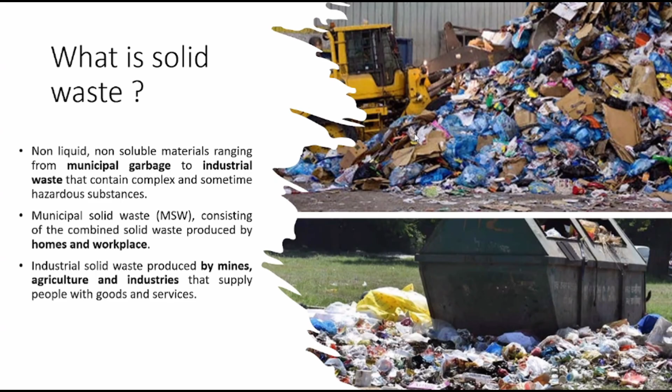Okay, so let's see in Malaysia. In Malaysia, we are producing almost around 39 kilotons of solid waste, which is equivalent to an average of 1.17 kg per person. So it means that per person every day we are producing on average 1.17 kg of solid waste. And this number of tons is actually increasing. It does not decrease, it is increasing.

And out of the waste that we are producing, 30% of the waste is municipal waste, which is from your households. And the only place where we are discarding all this waste is your landfill. So basically, whatever municipal waste comes from the household, factories, everything will be collected and it will go to your landfill.

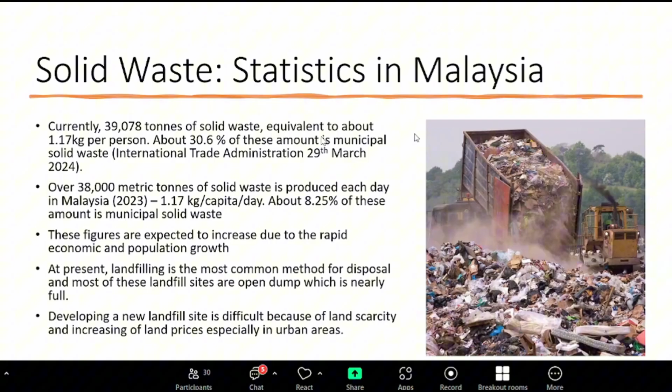And do you know how many landfills we have in Malaysia? Anyone? Ten per state, sir. You know. That's a lot. Okay, see, a landfill is not just a dumping area actually. 165, 135. From where are you guys getting these lucky numbers?

Okay, they are not just an open area where you just dump your solid waste. A landfill is actually a constructed landfill. It has some kind of layering, which we will see later. And for a landfill, you need a big, large area. It has to be separated from household areas. So it has a lot of criteria.

And especially in urban cities, you cannot have landfills like, how you say, 10 per state. Because when you have landfills, it smells bad. And it also invites all these infections because it's a landfill. You just dump your waste there.

So as Malaysia continues to grow in economy and population, our amount of waste is also increasing and it's expected to increase in future. So our major challenge here is how to dispose of our waste in a sustainable way. Sustainable way means whether you can convert your waste through recycling, or convert it to compost, or reduce the production of your waste. Okay.

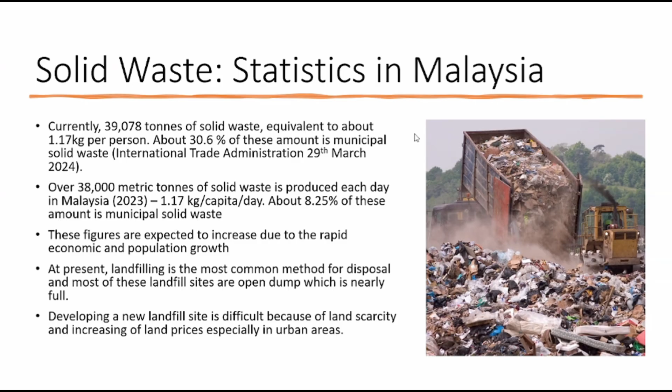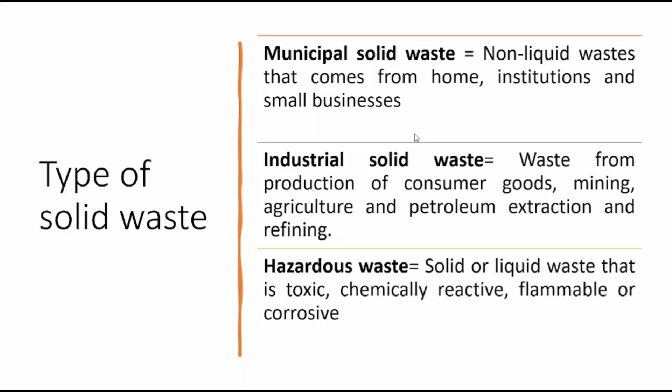Okay. So basically I have explained what is municipal solid waste, what is industrial solid waste, and also what is your hazardous waste here. So next, how you classify your solid waste, which is very, very important, especially if you are planning for waste management, recycling, composting system.

So as we know, our major component of waste is organic waste, which is your food scrap, or the papers, plastics. So generally, organic waste will make up 40 to 50% of your total waste. So it means composting could significantly reduce the landfill load. Because when you do composting, you need carbon source and also nitrogen source. And organic waste has carbon source. So you can reduce the waste, like food scrap, it has carbon source. So you can reduce it by using composting.

But one of the major issues here is plastic, the usage of plastic, because plastics are commonly used for packing. It's generally a single-use item, and there is a lack of recycling infrastructure for plastic. So that's why we are going to see plastic in more detail. So if you see plastic, you can divide them into several categories, and that category is depending on the property and also the recycling code.

So your first one is PET plastic, the plastic commonly used for your soft drinks and water bottles, which can be recycled into fabrics or new bottles. Then you have HDPE. So this is the plastic that you use for your detergent bottles, shampoo bottles. They are much stronger compared to your PET, and they are also recyclable.

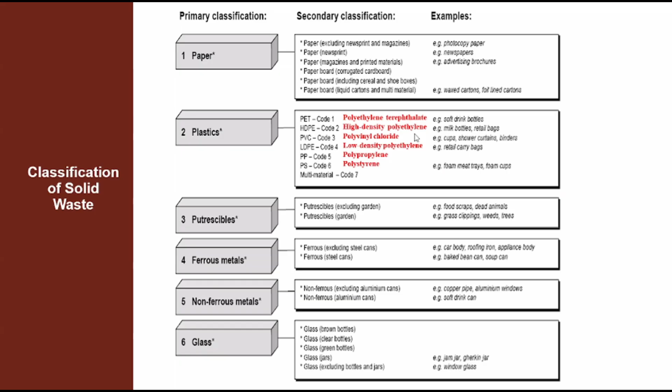Okay. So besides plastic, you also have other waste like paper, glass, rubbers, and many more. You can go through these two slides for it. Okay, so what we are going to see here is solid waste management. So now you know what is solid waste, what it is made up of, so how you want to manage it.

So managing solid waste is a process that involves collection, transporting, processing, recycling, and disposing the waste materials. So the main reason why you are managing your solid waste is because you want to protect human health and also you want to conserve the environment, so that you can make sure that resources are effectively used rather than degrading the environment.

Okay, so there are three components in waste management. The first is collection. So basically, you pick up the waste from the household or business or any streets, and then you transport it. So you move the waste to treatment or to any disposal sites using any transportation. And then finally, you dispose or you process, where you handle the waste. Either you want to do recycling, incineration, landfilling, or composting.

So in many developing countries, generally collection and disposal is the one that is highlighted. While when it comes to recycling and reduction, it's something that they haven't looked into. So generally people see how to manage the waste that has been produced, but they never thought of converting the waste into something else or reducing the waste.

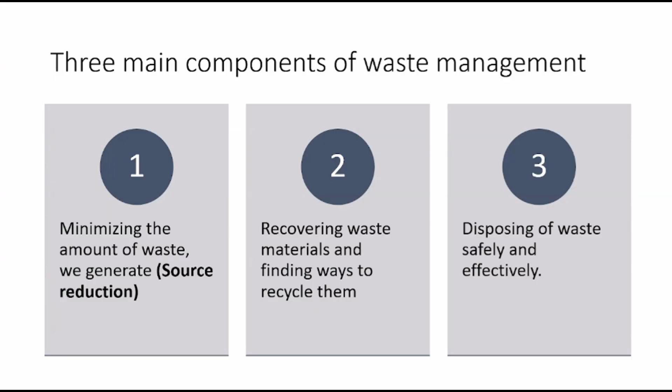Okay, so that's if you see household. So if you focus on industrial, there are many kinds of steps where you can reduce your waste. For example, if a waste stream is there, there are several steps where you can reduce your waste. For example, you can minimize the packaging for products. So maybe instead of individual packaging, you can do group packaging, or you can use a green consumer product like a biodegradable product instead of a product that cannot be recycled.

Then you can reuse items like glass bottles. Maybe you can reuse them once you have given them to your customers or to shop vendors; you can collect them back, sterilize them in a nice way, and reuse them, or you can recycle the items. Or if you have organic waste, you can convert it using composting techniques and make it a new product, where the compost can be used to grow trees.

So these are the steps that you can use to reduce your waste so that the amount of waste that goes to landfill is reduced. Okay.

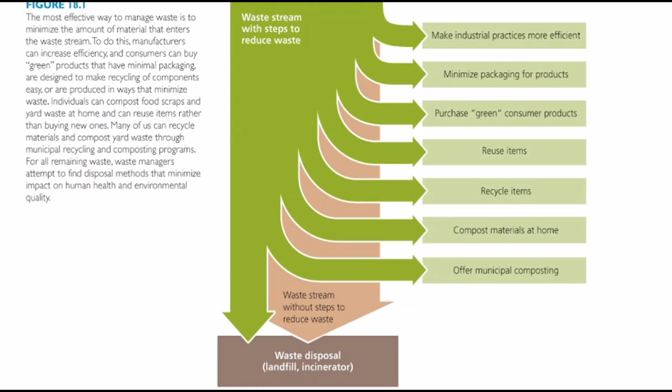Okay, next is municipal solid waste, which is your household waste. This is waste produced in everyday life, and it is usually referred to as trash or garbage. It includes household items, food scraps, paper, packaging, plastic, anything that we generally discard at home. And the composition of waste varies from place to place because of our culture, our lifestyles, and also the economic status.

So generally, like Malaysia, we are a developing country. We discard a large portion of organic material in terms of food waste. When we look into wealthier nations, they discard more paper, packaging, and plastics, which is their main solid waste. Okay.

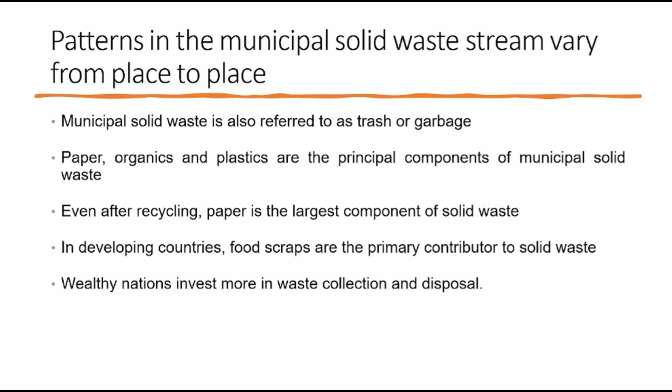Okay. So as I mentioned previously, every day we as consumers, as Malaysian citizens, are generating 1.17 kg per person per day, which ends up in our landfill. Around 90% of this waste is still in the landfill, and only 10% of the total generated waste has been recycled. So that puts pressure on our landfill system because it is nearing capacity.

So it's like over 40% of Malaysia's 175 disposal sites are still operating as dump sites, which we call landfills, and they lack environmental control because of our rapid waste generation. So that's the reason we have to focus on sustainable waste disposal.

Okay, so when we talk about a waste management system, it should not only focus on disposal and collecting your garbage. It has to be a modern system, an integrated waste management. Integrated waste management combines various strategies to handle waste more sustainably so that you can minimize the total amount of waste that ends up in the landfill. This whole system includes waste reduction at the source, recycling, composting, and proper disposal.

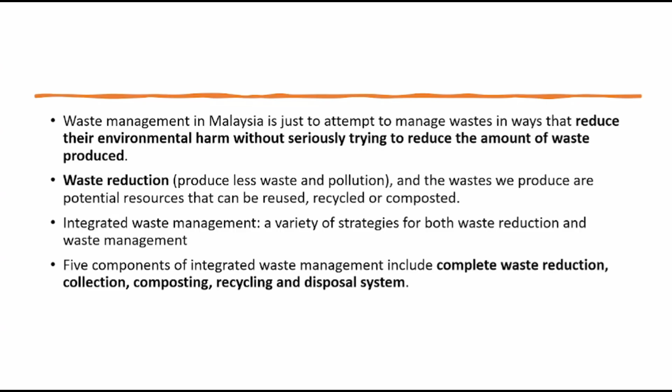Okay, so just now I was talking about landfill. So what is a landfill? A landfill is basically called a sanitary landfill. It's a modern engineered facility where you isolate your waste from the environment until it becomes safe. Okay?

Because when waste is discarded, it will start to decompose, especially your organic waste, and it will release gases and microorganisms, which could be hazardous to the environment and also human health. That is the reason a sanitary landfill is built, so that it isolates the waste from the environment and from human beings. So this is not like an open dump area.

Your sanitary landfill is designed with liners, a drainage system, and monitoring wells. When your waste starts to decompose, it releases a liquid called leachate. This is a contaminated liquid which forms when rainwater filters through waste and dissolves harmful chemicals. Okay, so that's the reason you have to manage it properly. If it is not properly managed, leachate can pollute your soil and your groundwater.

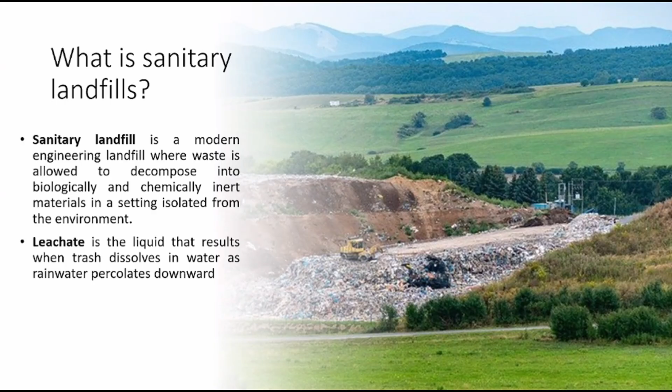Okay. So when I say a landfill is an engineered structure, this is how it is constructed. It's all about layering. It has 4 main layers, and those 4 main layers make sure that the waste does not harm the surrounding environment. So your first layer is called the liner system. Basically, it's the base of the landfill.

And it is made up of compacted clay, which is dense enough to prevent water from seeping through. So basically, the compacted clay makes sure that no water seeps through and goes to the nearby soil or groundwater. Then on top of that, they have installed this high density plastic liner, which gives extra protection. And that creates the barrier between the waste and the natural soil and the groundwater. So that is the liner system.

And then it is followed by the drainage system. As your waste decomposes and the rainwater starts to percolate through it, the liquid, called leachate, will start to collect at the bottom, right? So to manage that, they have installed these pipes above the liner. Those pipes collect the leachate and channel it to the treatment plants. Okay, so the treatment plants will remove all these contaminants.

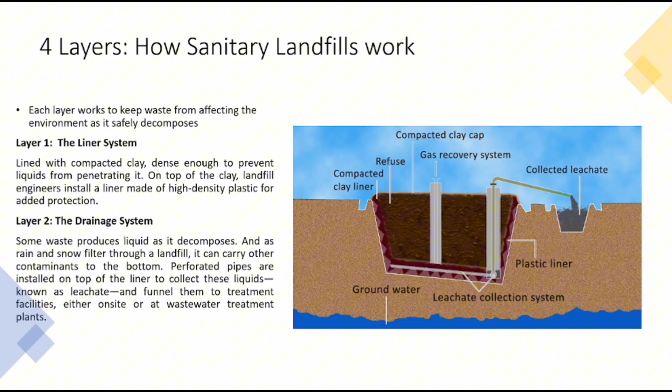Okay, so the next layer is the gas collection system. As your waste decomposes without oxygen, it will produce gas, mainly methane and carbon dioxide. Methane is highly flammable and is a greenhouse gas. So to prevent any explosions or air pollution, modern landfills install gas extraction wells. These wells collect the methane gas, and this methane can be purified or converted into energy to produce electricity. So basically, they convert the byproduct into a resource that produces energy.

And then the final layer is the trash itself. This is the place where waste is placed and compacted to reduce its volume. New trash is covered with a thin layer of soil to minimize odors, pests, and fires. So for years you are dumping your solid waste in the landfill, and once it has reached its capacity, it will be capped with another layer of liner, covered with soil and vegetation.

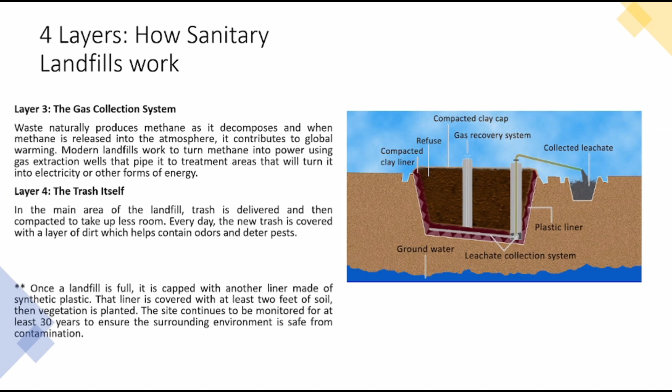So if you see the diagram, this is the complex structure of a modern sanitary landfill. At the bottom, you can see the layers that I have mentioned. You have clay, plastic liner, and sand, which prevent the leachate from contaminating the groundwater. Then you have the leachate pipes, which collect the leachate, the liquid waste, and send it to the treatment system so that it can be disposed of safely. And then you have wells that extract the methane gas and store it in a tank for energy production.

Okay. And you also have these monitoring wells. The monitoring wells detect any leak of methane or contaminated water, so that if it is detected, preventive or corrective action can be taken. So basically, this is a state-of-the-art sanitary landfill. Okay. So what are the disadvantages of landfills? Anyone?

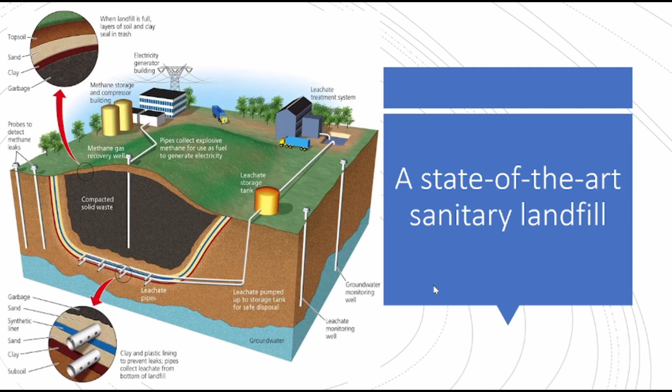Okay, so even if you have this many layers in the system, you have pipes collecting the leachate, you have wells collecting the methane gas, there is still a drawback in your landfills. Because landfills have liner layers, what happens if the liner gets cracks or tears? Because it's there for years, how do you monitor the liners, whether any crack or puncture happens or not?

So that's one. And then you have this leachate collection system, which requires constant maintenance. But in reality, how frequently are they doing the maintenance for it? So over time, the toxic fluids may escape and contaminate your groundwater and also soil.

So another issue that you have is land. You need a huge land for a landfill. A landfill is not something where you open a small land and you get all this. If they want to do a landfill, of course you need a huge land, and it has to be away from cities and coastal areas. So where do you find land for that? Okay, so these are some of the drawbacks of landfills.

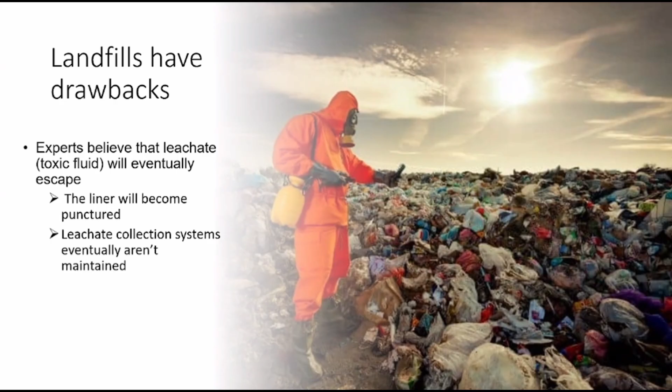But another advantage of landfills is that they can actually be a source of renewable energy if you manage them in a proper way. Because in Malaysia, 40 to 50% is organic material, which can be decomposed in an oxygen-free environment, and the bacteria produce landfill gas, which is about 50% methane.

So the methane gas, you can collect it, you can process it, and you can convert it into natural gas. And this natural gas you can use to generate electricity, or produce heat, or eventually produce biogas that you can use as fuel for vehicles. Okay, so that is another advantage of it.

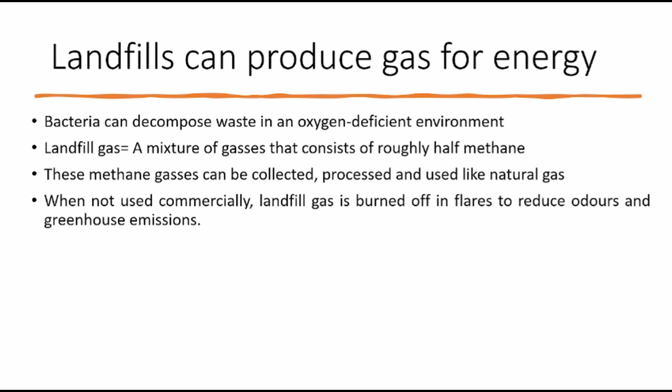Okay, so besides landfill, another way to treat your waste is incineration. Incineration is basically a technique where you burn the garbage or solid waste at a very high temperature in a controlled facility. This will reduce the volume of waste by 90%, so you can save landfill space. However, the incineration procedure produces ash and also gases that must be treated so that you avoid releasing harmful chemicals to the environment.

That's the reason you have devices like scrubbers and filters, where once it burns, they will cleanse the gas, neutralize the acid and any chemicals, and also remove the particulates before it is released to the environment. Besides that, when combustion happens at a very high temperature, it produces heat. This heat you can use to produce steam or electricity, which is known as waste-to-energy technology.

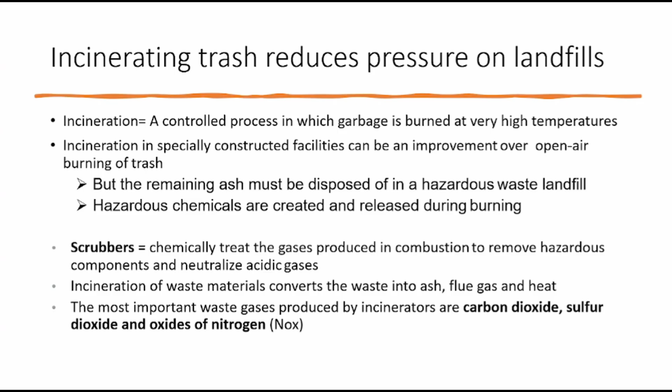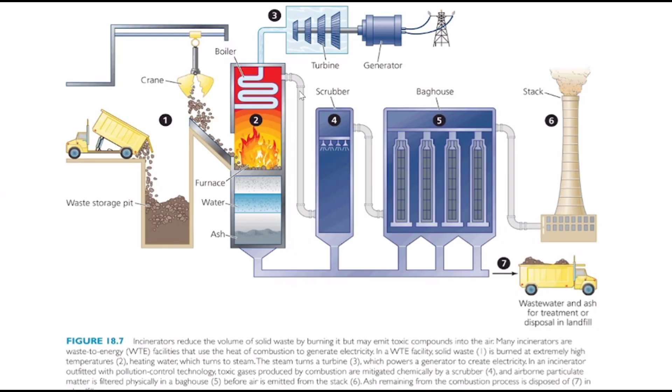Okay. So we have covered how solid waste is discarded at the landfill and by incineration. So now, how do you reduce your solid waste? By using the 3 R's: reduce, reuse, and recycle. Reduce means you consume less and live a simpler lifestyle. It means you avoid unnecessary packaging, buy durable goods, or say no to single-use plastics.

And then reuse. Instead of throwing the item away, you find a new use for it, like donating clothes or repurposing your containers. And then recycle. Recycle means you separate your paper, metal, glass, plastic, so that you can reprocess them into new products. If everyone applies the 3 R's, we can actually reduce the amount of waste that goes into landfills or incineration.

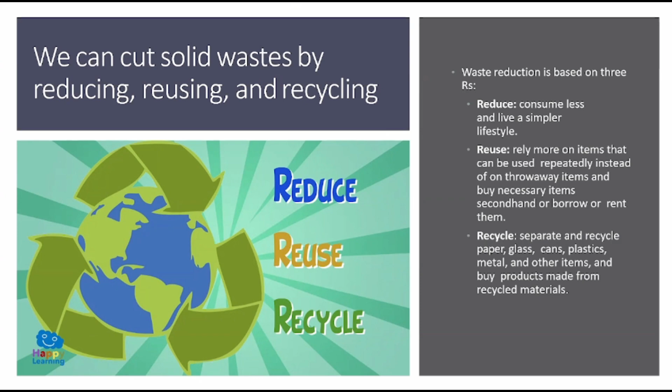So that's the reason why we are having environmental biotech. I hope everyone will use this 3 R concept and start to reduce the waste that you are producing. Okay.

This 3R concept is not only applicable for individual or household, it also can be applicable for industrial, because even though the waste produced in household is less hazardous compared to industrial waste, the effective way industrial can manage their waste is they can redesign manufacturing processes to use less material and energy, or develop products which are easily repaired, reused, remanufactured or recycled, and eliminate unnecessary packaging. They can also create incentives such as pay-as-you-throw systems, where you charge people for waste but giving free pickup for recyclables. This helps reduce solid waste and eventually reduces pollution at the source itself, making it more environmentally friendly.

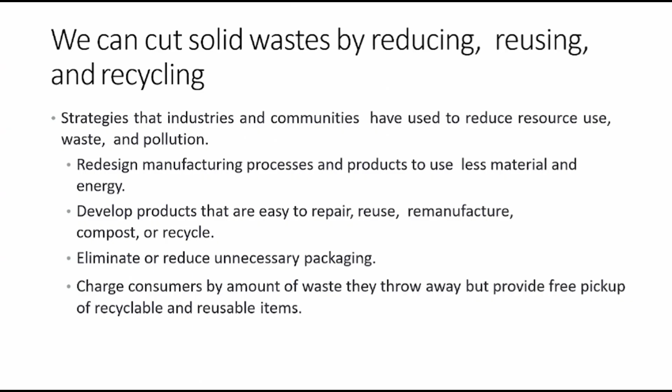There are advantages in recycling, but there are also disadvantages. Recycling usually saves raw material, reduces energy use, and cuts pollution. However, recycling is a challenging process because it can be expensive and requires people to segregate or sort the waste, and not all materials are recyclable. For example, if you have contaminated food packaging or mixed plastic, it is technically difficult and often uneconomical to recycle.

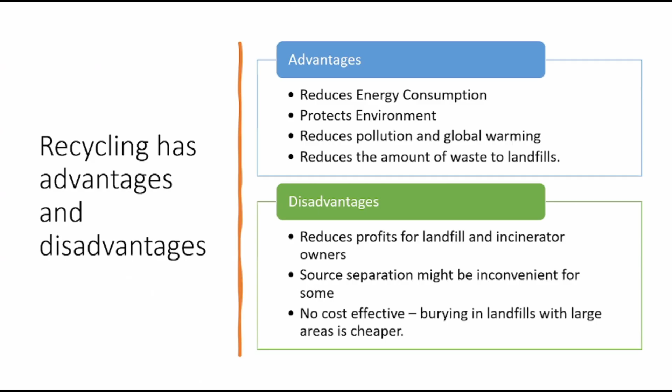Okay, next we will focus on industrial solid waste.

Is everyone awake? Hello? Is everyone awake? Yes, yes, halfly trying to be. Thank you, to be honest. Okay, it's okay, I have another 10 more slides, so just bear with me.

When you talk about industrial solid waste, it comes mainly from agriculture, factories, mining, and construction. Industrial materials like metal scrap, sludge, chemicals, and defect products are the major solid waste in industry. Like municipal waste management, industrial waste also has a lot of methods, but they need stricter treatment because the waste produced is more toxic compared to household waste. Some industries have industrial symbiosis, where waste from one factory becomes a resource for another. For example, using fly ash from power plants in cement production. That's how they reduce waste production.

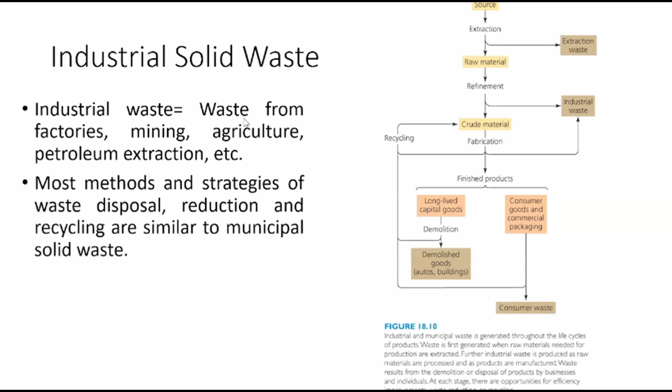Then you have your hazardous waste. It is defined as waste that is dangerous and potentially harmful to human health and the environment. It includes materials like toxic, corrosive, flammable, and reactive substances. Examples include solvents, heavy metals, pesticides, and medical waste. Industries like chemical manufacturing, metal manufacturing, and rubber goods are the major sources of hazardous waste. Even a small quantity of this hazardous waste can cause serious harm. For example, mercury or cyanide, where a minor volume can cause fatalities.

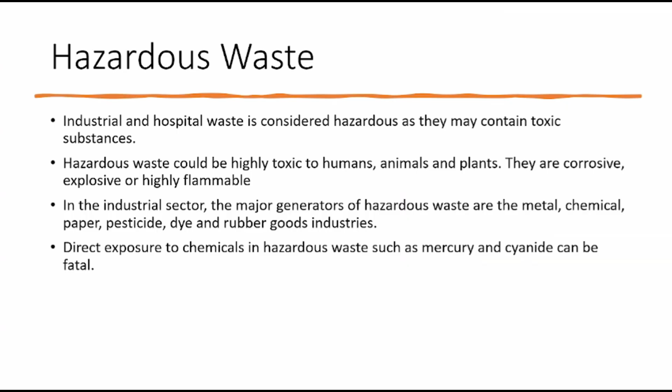If we talk about hazardous waste, it is not only produced by industrial or hospitals. Even households actually have hazardous waste.

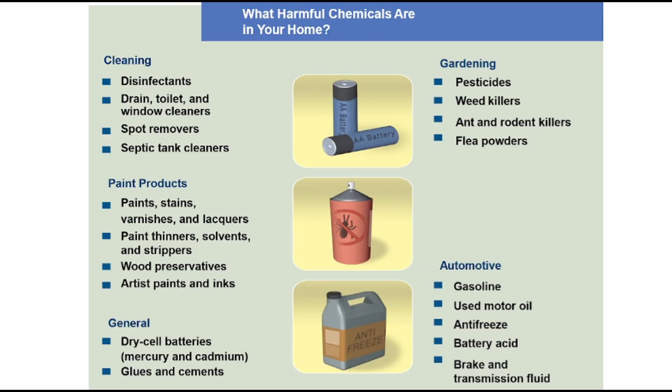Hazardous waste can be divided into three groups, or classified into three groups. You have organic compounds like dioxins and pesticides, where they persist in the environment and accumulate, known as bioaccumulation. Then you have heavy metals, for example mercury and arsenic, which are toxic—even in small amounts they can damage your nervous system. And then you have radioactive waste, generally produced by nuclear power plants or medical uses, and these are waste that require long-term isolation.

These are hazardous waste that do not break down easily and can remain dangerous for decades. That's the reason why they are classified as hazardous waste, and they cannot be discarded as normal municipal solid waste.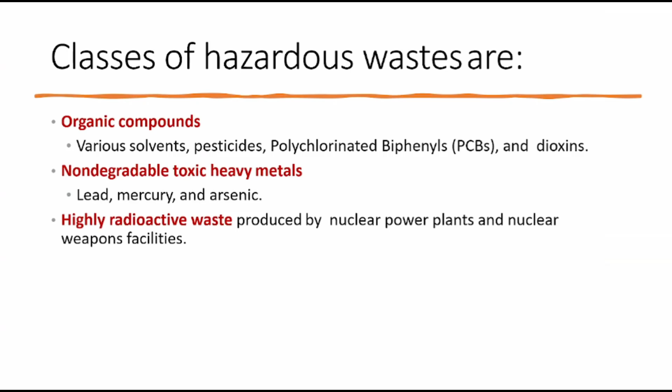Organic compounds are hazardous because their toxicity persists over time, as they resist decomposition. Unlike organic material like food scraps which decompose over time, organic compounds from hazardous waste do not decompose.

These compounds can enter the food chain and accumulate in fatty tissue. Over time they can cause chronic diseases. Many are mutagens and carcinogens, which can damage DNA and cause cancer. Examples include dioxin and pesticides.

Then you have heavy metals. These are widely used in industrial applications and will enter the environment if not properly disposed of, including e-waste like batteries and electronic waste. Once heavy metals are in the soil or water, they bioaccumulate, meaning they build up in a living organism and move up the food chain, from one organism to another. That is why e-waste and industrial effluents must be handled under strict protocol.

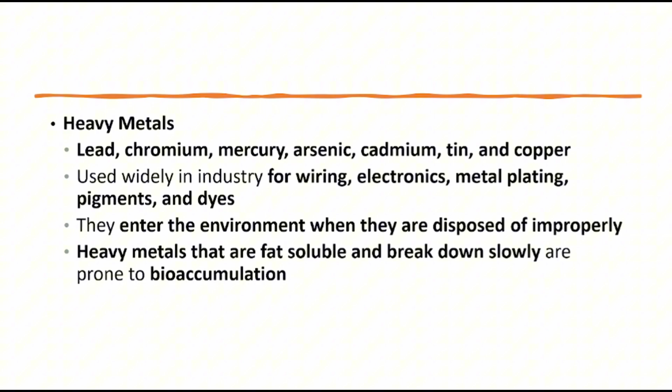Next is e-waste. This is the era of digital devices. Everyone has a phone, laptop, tablet—everything is digital. Phones, televisions, computers, printers—everyone has electronic devices. When you stop using a device and discard it, it becomes e-waste. So how are you going to discard your e-waste?

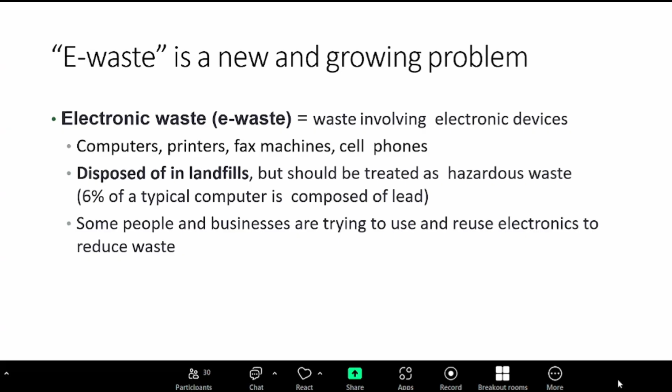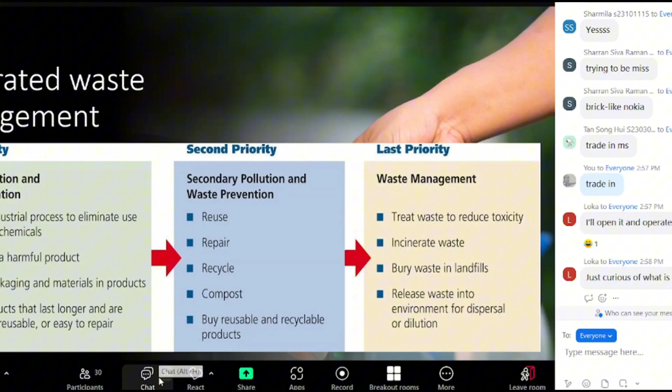Next is integrated management for hazardous waste. When it comes to hazardous waste, there is a hierarchy of priority: first, second, and last priority. The first priority is waste prevention, where you use less harmful products instead of hazardous materials. That's how you prevent waste.

The second priority is conversion of hazardous waste to less harmful substances, like reuse, repair, recycle, compost, or buying reusable or recyclable products. The final one is waste management, where there's no choice—no matter how much you reduce, repair, or recycle, you still end up with waste, so then you manage it.

You treat the waste to reduce its toxicity, then do incineration, and dispose of the burnt ash in landfills. That's integrated waste management: first you reduce the waste, second you convert the waste, and third you manage the waste.

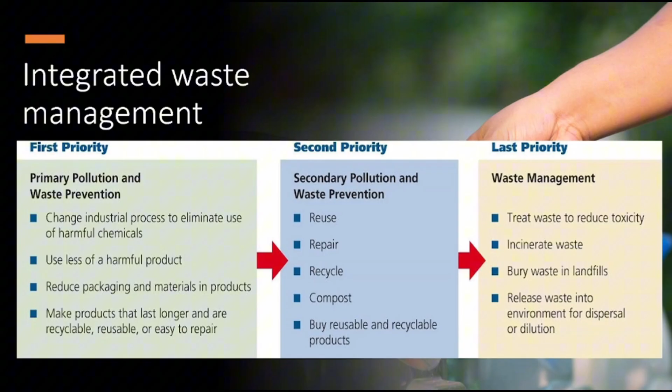So when you have hazardous waste, can you detoxify it, since hazardous waste contains toxins? There are several methods. First, bioremediation—a technique using bacteria or enzymes to break down toxins into harmless compounds. Then you have phytoremediation, where plants absorb or filter contaminants from soil or water. Finally, there's another process called incineration.

So basically, you burn your waste and destroy your hazardous chemicals through combustion, which produces carbon dioxide, water, and remaining waste. Each of these methods—bioremediation, phytoremediation, and incineration—has its own pros and cons, but they all help reduce long-term environmental risk. So when you have hazardous waste, you can not only manage it but also try to detoxify it to manage its long-term environmental risk.

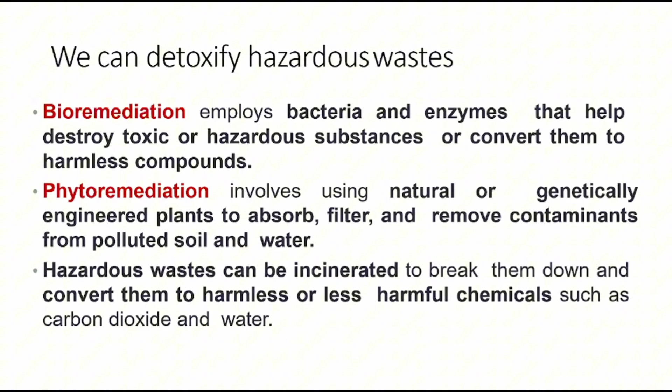Okay, so there are another three disposal methods for hazardous waste: secure landfill, surface impoundment, and deep well injection.

Secure landfill means you have an engineered site with multiple layers of liners and a leachate system. Surface impoundment uses ponds or lagoons which temporarily store liquid waste. Deep well injection involves injecting liquid waste deep underground into rock formations, basically isolating the hazardous waste. These methods do not neutralize or detoxify the waste, but they prevent it from interacting with the environment.

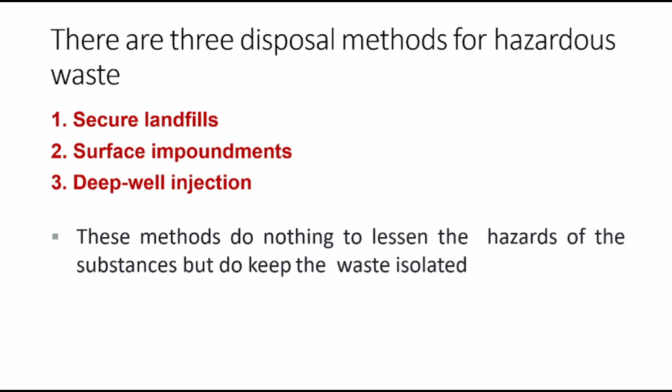Secure landfills are stricter compared to normal sanitary landfills, which I mentioned previously. Secure landfills have more liners and a leachate removal system. They can only be operated by trained persons, and the site is generally monitored continuously. This type of landfill is only suitable for hazardous solid or sludge that cannot be treated by chemicals.

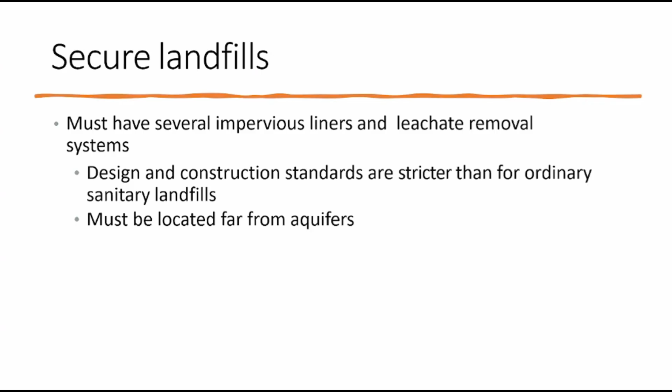Then you have surface impoundment, which is a shallow depression lined with a plastic and clay where liquid hazardous waste is stored temporarily. After evaporation, the remaining solids are removed and placed in secure landfills. However, there's a risk: if the liner cracks or rain occurs, it may overflow the liquid waste into the soil and contaminate groundwater. That's why this method is strictly regulated, since the risk of contaminating groundwater is higher.

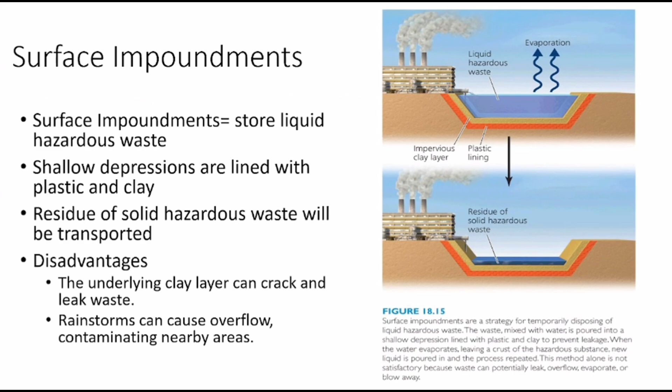However, since it's a well, it has chances to corrode over time. Once it corrodes, the waste might migrate to other layers—from the porous rock it can travel to impervious soils and many other layers. Also, drilling deep wells into the earth may induce small earthquakes in some regions. That's why it should only be used when no other options are available: first you use secure landfill, then surface impoundment, and only when you don't have these two options do you go for deep well injection.

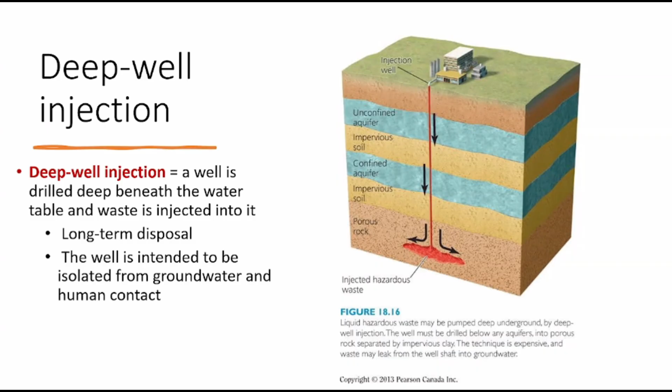So overall, the waste management hierarchy ranks options based on environmental preference. The most preferred option is prevention, where you avoid creating waste in the first place. Next is reuse and recycling, where you conserve resources. Then energy recovery, like incineration, where you generate power. Finally, disposal is the least favored option—landfill or incineration without energy recovery should be your last option. This hierarchy guides modern waste policy worldwide.

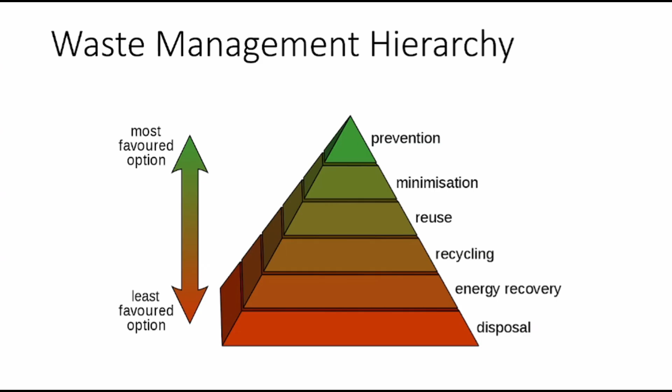Now, the technology that contributes to waste management. Modern technology is transforming waste management. You have RFID tags attached to bins to track collections and calculate the waste generated by each household. You also have GPS devices to monitor the movement of garbage trucks for proper route planning and improved efficiency. And there's rear vision camera systems that allow real-time monitoring of collection, improving safety and transparency. This smart waste system supports better recycling rates and accountability.